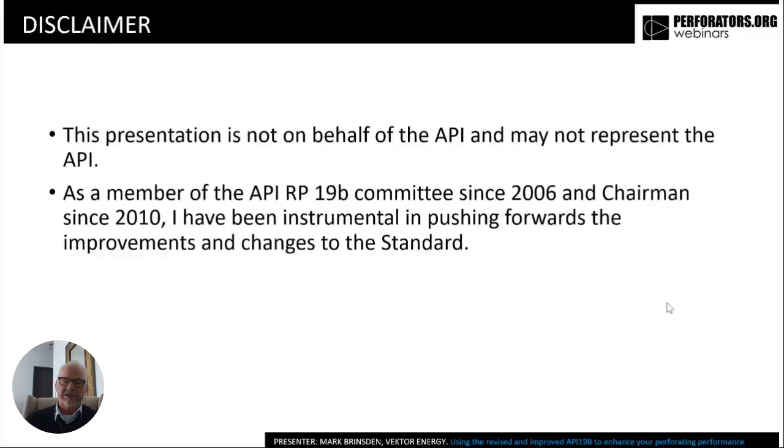What's really important is acknowledging something in this industry, and I want to push this quite hard. It's all about voluntary efforts. There are so many engineers working for operators, service companies, and manufacturers who make it possible for us to have this high quality of API standards. A huge amount of work has gone into this over the last 5, 6, 7 years in making this new standard.

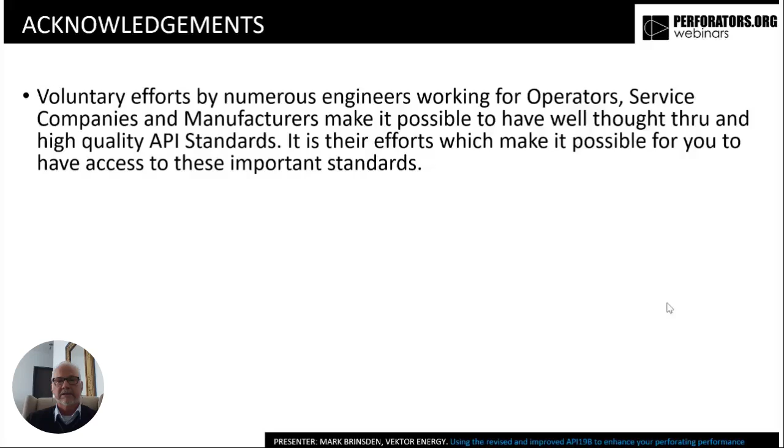Let's be very clear, this is down to individuals who give their own personal time to make things happen. I'd like you all to think about how you can also help deliver standards with the API and other standards organizations, and importantly, volunteer with groups like the IPF and the SPE and those kinds of industry bodies. Volunteer participation is so important.

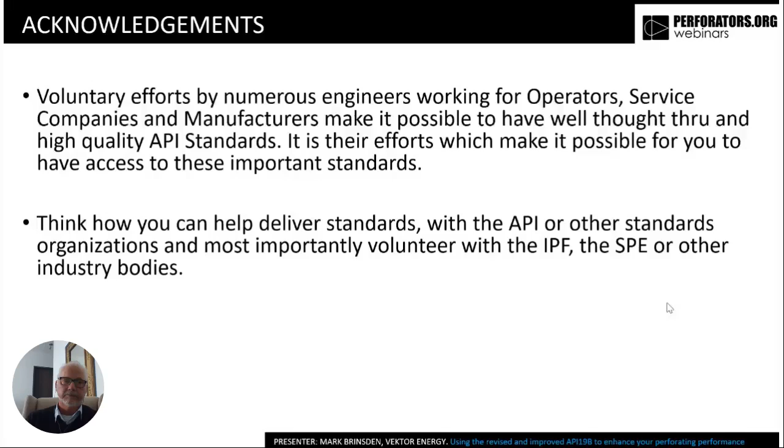There are now 3 API committees involved with perforating. There were 2, but in the last 18 months or so we started another one. The one we're covering in this presentation is the API RP19B. There's also the RP67, the explosive safety recommended practice, which covers all aspects of explosive safety. The new edition comes out with a major increase in scope and is much more comprehensive and detailed.

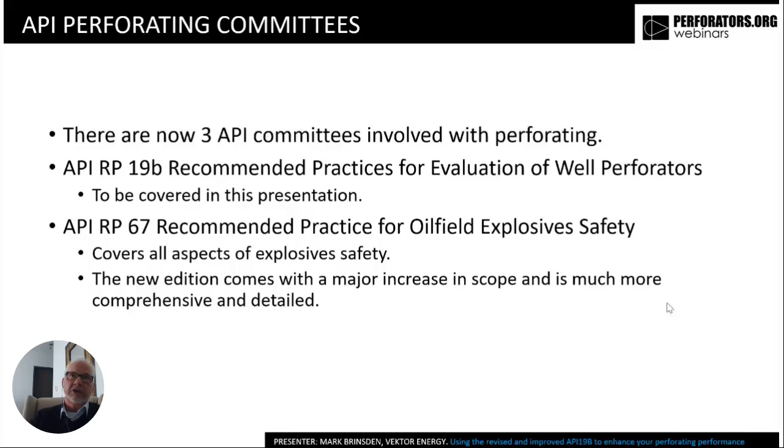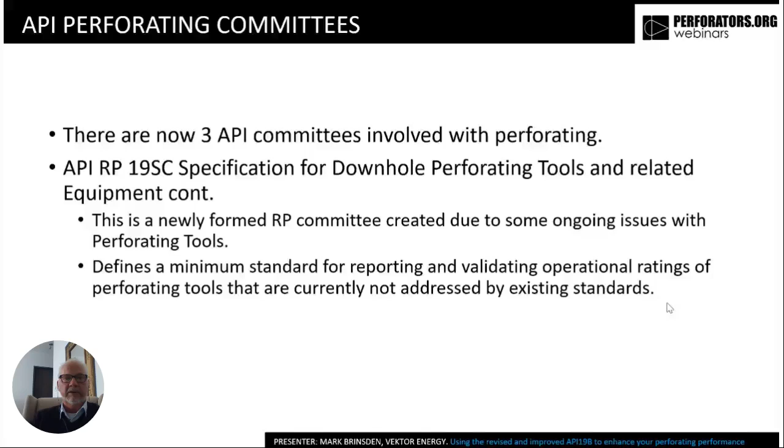I do hope we will get a chance to have a webinar on this topic as well in the next few months, and I'm sure we will. There's also another new one, a specification for downhole perforating tools and related equipment. This came about because people noticed we were going to higher pressures, and they wanted to make sure the tools were performing as required and the standard was being maintained. It defines a minimum standard for reporting and validating operational ratings of perforating tools not covered by any existing standards, covering things like perforating gun materials, connections, seals, cutters, etc.

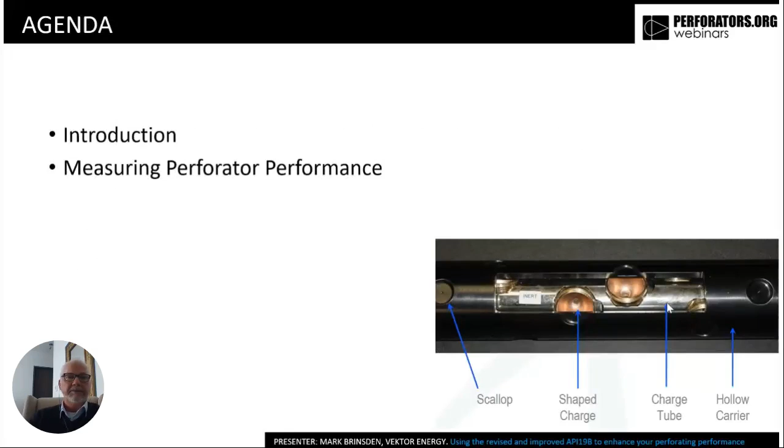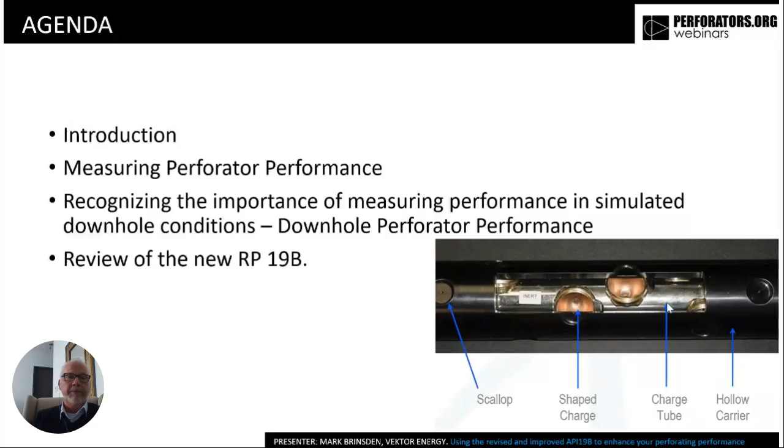So the presentation today is an introduction. We'll talk about measuring perforator performance traditionally, and recognize why it's important to measure perforator performance. Then we'll look at the new API19B and how that's changed from the original one, and look at some conclusions and takeaways.

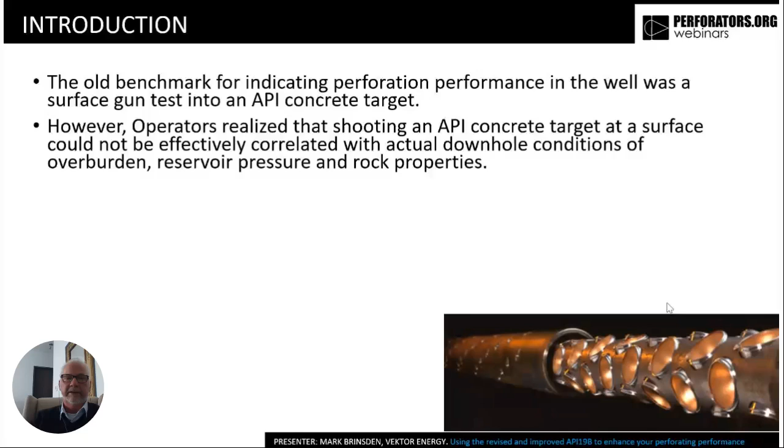For example, the old benchmark for indicating perforator performance in wells was a surface gun test, an API concrete block, and that was great. It created a very consistent result that everybody could compare gun to gun with. However, as operators, we found that the API concrete target was not really representing what was going on downhole, and we couldn't get any real correlation between the concrete target and actual downhole conditions. In downhole conditions, we have overburden, reservoir pressure, and rock properties that all have a big impact on penetration.

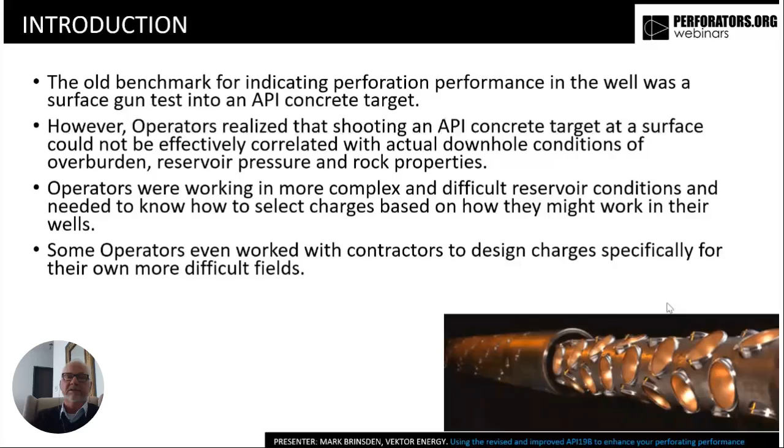As we were starting to work on more difficult reservoirs, we found that we really needed to find a way of selecting charges based on actual performance. Some of the operators, including my previous employer, worked a lot with contractors to design charges specifically for their own more difficult fields, the reservoirs and the rocks, etc., in those fields.

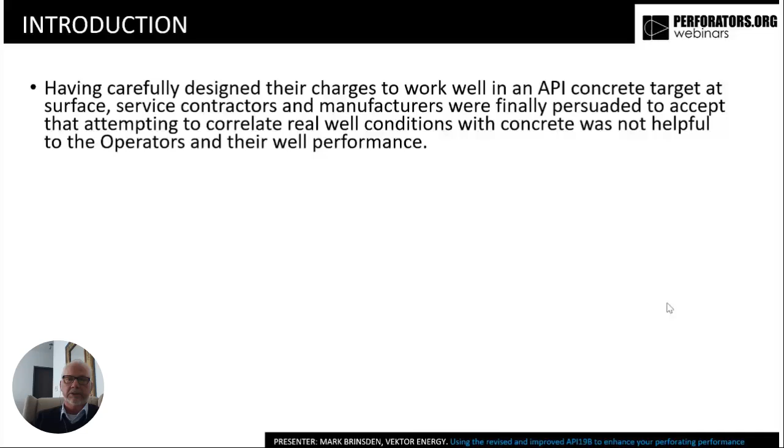From the contractor and manufacturer point of view, having already spent a lot of time designing and manufacturing these new concrete-based charges to perform well in surface concrete, there was a little bit of reticence to move forward with this for a while. But they were very good once they realized this was going to happen, and they all pulled together very well.

With a lot of effort from contractors, manufacturers, and operators, we now have new standards being written to promote shots into stressed rock targets as the main standard for identifying the kind of performance we might expect downhole.

All the major contractors and manufacturers have now dedicated facilities, which is really important.

Okay, I'm still getting issues about not clear enough.

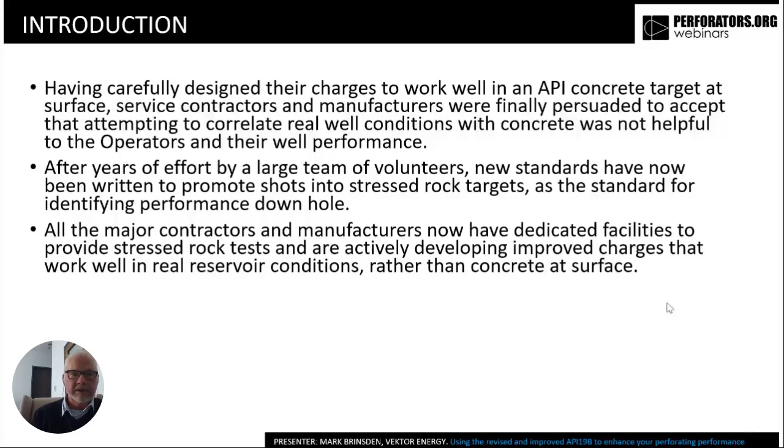All the major contractors have now dedicated facilities to provide stressed rock tests, and that's an amazing accomplishment. A lot of effort, time, and money has been put into this. The last 5 years have seen significant developments in technology with contractors and manufacturers working actively to improve performance and technology.

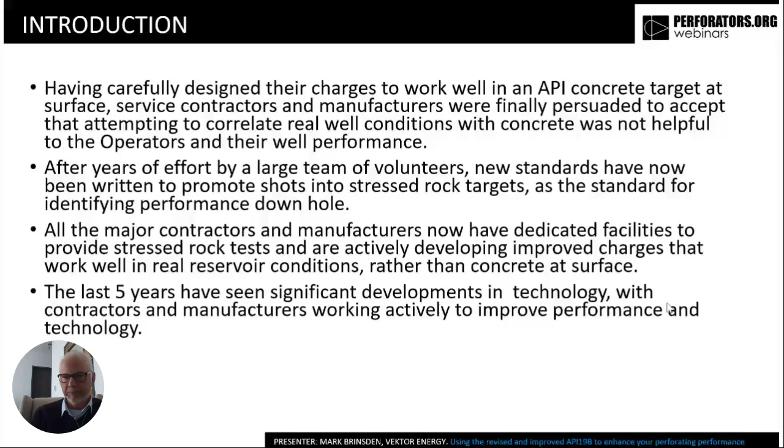and technology. It was very good when they held the mic up. Okay, it's meant to be very good all the time.

Looking back over the last 10 to 15 years, we were told originally that API penetration is measured in concrete, not rock.

Rock is really the best target, but we were told it's very expensive and not repeatable. For example, the Berea sandstone target we were getting at the time was very inconsistent, with different porosities and hardnesses, resulting in very different performance.

Concrete was seen as a very repeatable target, and they even changed the concrete design to a 16/30 frac sand target, which is also relatively reasonable in cost. There's a large database of performance in concrete, so everybody was really pushing towards that.

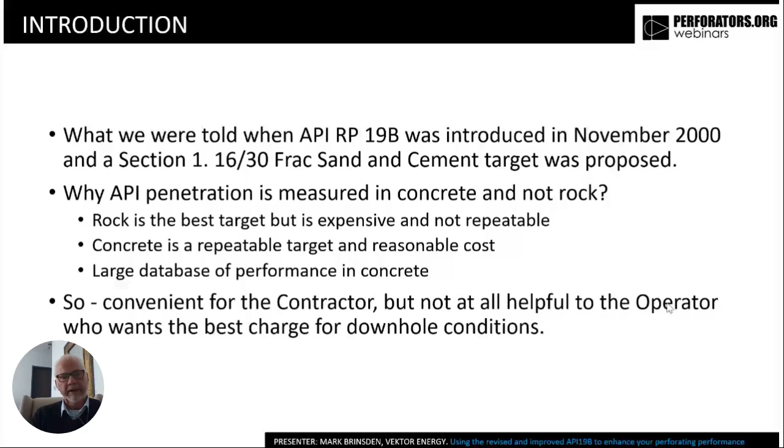It was very convenient for the contractors, but those of us in the operators group wanted something to tell us more about what was going on downhole and how to compare charges from different contractors and manufacturers, rather than just going on concrete performance.

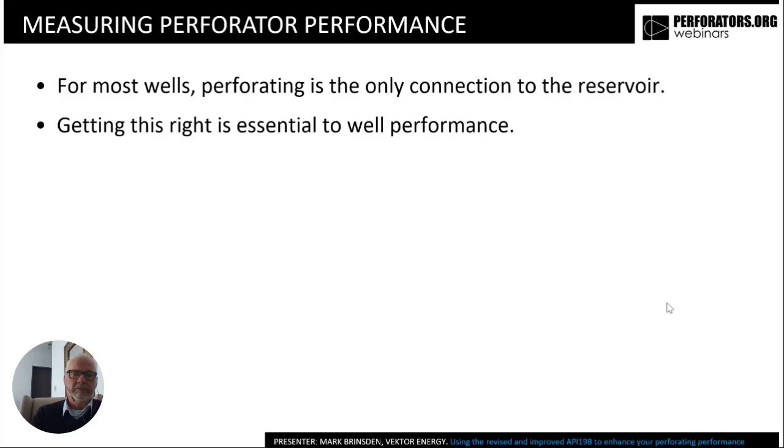For us as operators, it was very important because perforating is the only real connection to the reservoir, and it was really important to get that perforation right so we get good well performance.

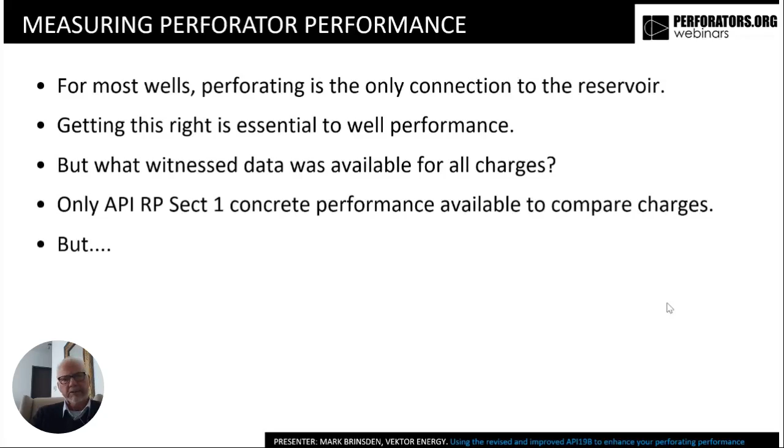But only API section 1 concrete performance was available to compare charges, and it really wasn't good enough. We really needed something better.

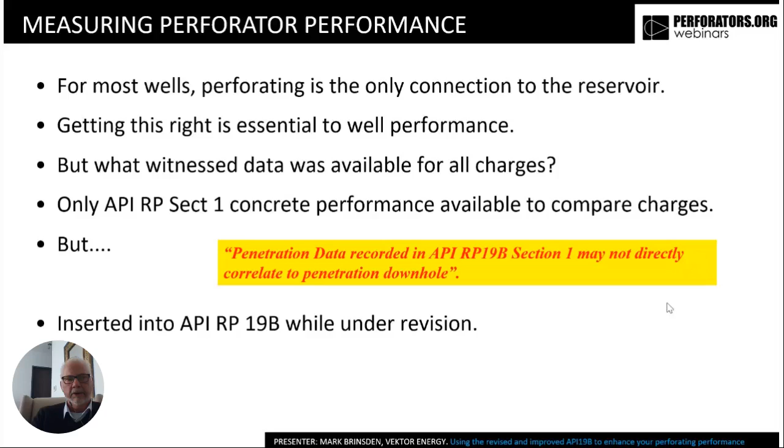About 4 years ago, we inserted this statement: penetration data recorded in API 19B section 1 may not directly correlate to penetration downhole. This was to make sure people were aware that the general consensus in the industry was moving away from a concrete target toward understanding what was really going on downhole.

Now let's look at measuring perforator performance in section 1, as traditionally done. Here's a picture of the target with the casing, and the concrete was set for 28 days to create a consistent strength.

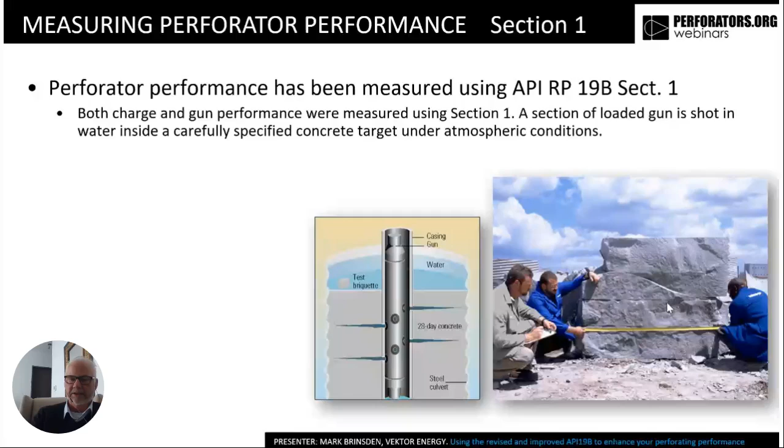It had to be above 5,000 psi compressive strength. You can see on the right a picture of shots going in as the target is split, showing the nice clean lines from the shots entering the target.

While we don't think it's very good from a point of view of penetration in downhole conditions, it does give a fairly good overall indication of charge interference within the gun and an indicative range of perforator performance. Sometimes when you look at charge data sheets, some penetrations might be 50 inches, and others 25 inches. So while the average might be 40 inches, the actual variation is quite considerable, giving an indication of the quality of manufacture of the charge.

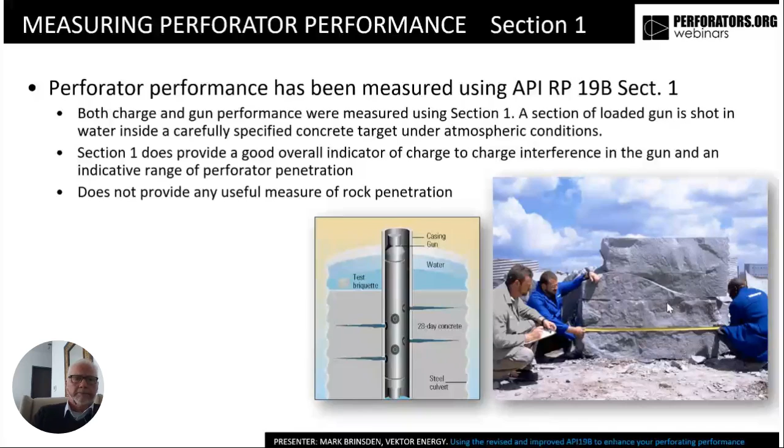Interference is also a big issue, because if the gun is designed incorrectly, charges can interfere with one another and block or disrupt the shot. But as we said, it doesn't produce a significant indication of penetration in downhole conditions.

Interestingly, this is a graph used way back in 2000 to demonstrate why concrete-to-rock correlation was sufficient for use. As you can see, there's a nice straight line through the charted results.

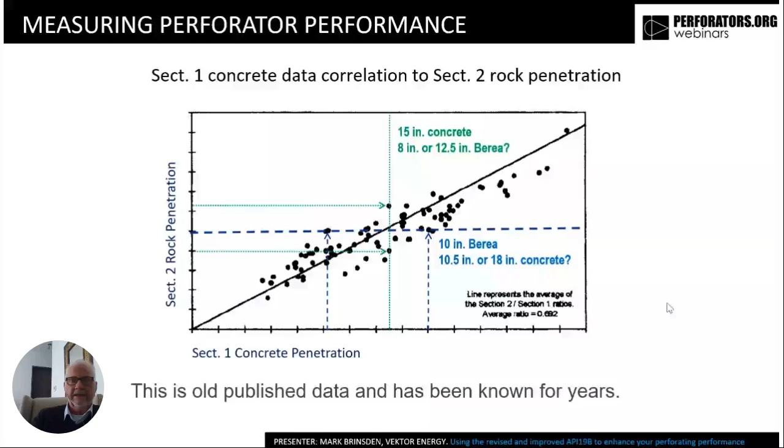However, when you analyze it in more detail, you can see here in the blue lines, for example, that a 10-inch penetration in Berea shows as 18 inches in concrete. That's not looking too great. And for the same charge in concrete it's 15 inches versus 8 inches in Berea. So we were really getting an issue there with relative performance in rock compared to concrete.

The next test, which was very useful for the development of charges for rock, is the stressed Berea sandstone target.

It's very often now used as a charge development tool, as it's relatively quick. It's quite easy to do several tests a day and adjust the charges and look at the performance in relatively good downhole simulated conditions.

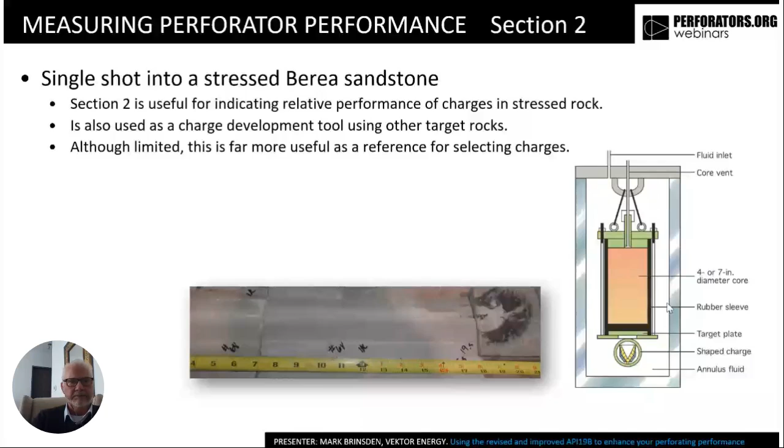Then we have the single shot into a steel target in section 3 under temperature. It's very useful again for looking at performance at temperature.

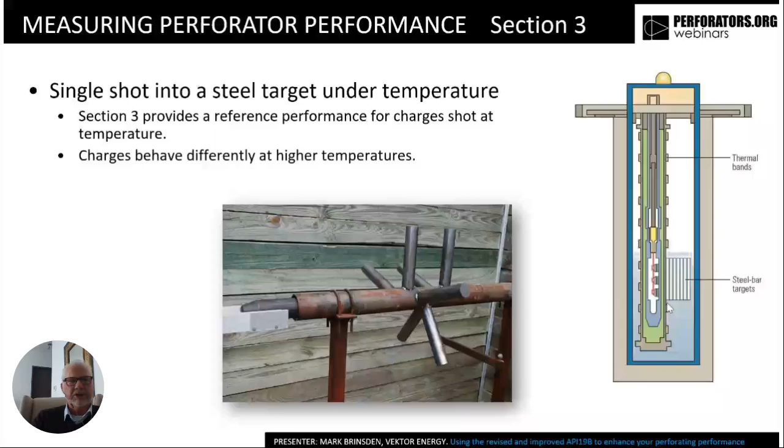And then a very important one, section 4, where we have a single shot into a stressed rock target with fluid pressure and flow. Closest thing really to simulated downhole conditions, and enables us to flow through and backflow, and also look at things like gun volume factors, the way the pressure on the simulated wellbore side and the simulated gun chamber side impact the tunnel and how clean the tunnel is, etc.

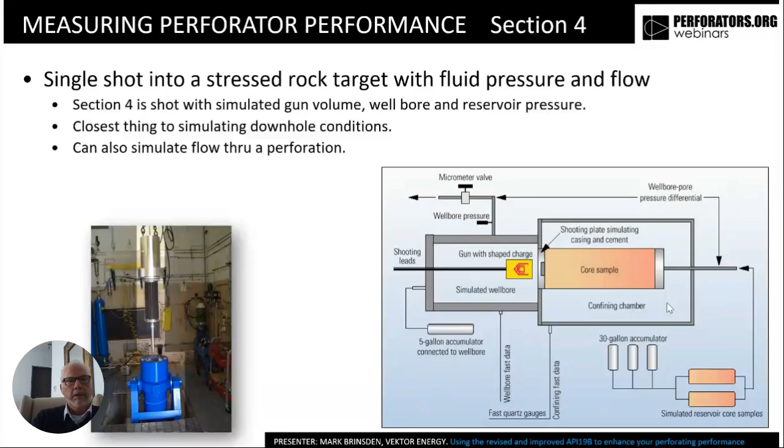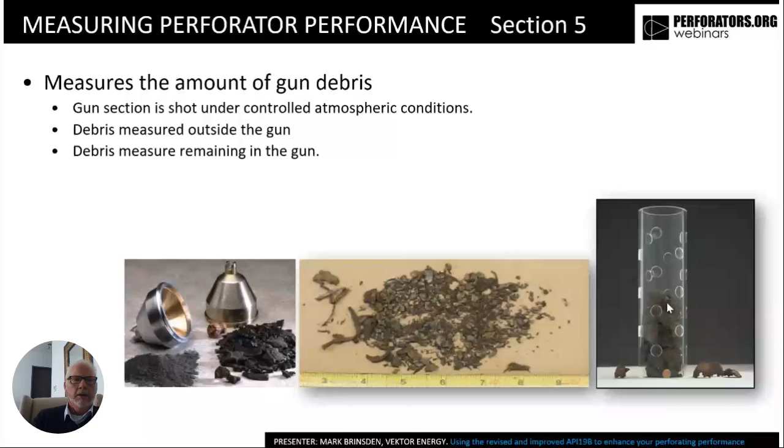Now, let's have a look at measuring perforator performance. So we were looking at how the existing systems were earlier on, and we wanted to find out why that is important now going forward for the difference between concrete and rock penetration.

So it's important for when, for example, you're deciding to use a more expensive charge, that you are aware the charge is actually performing significantly better under the conditions you're talking about.

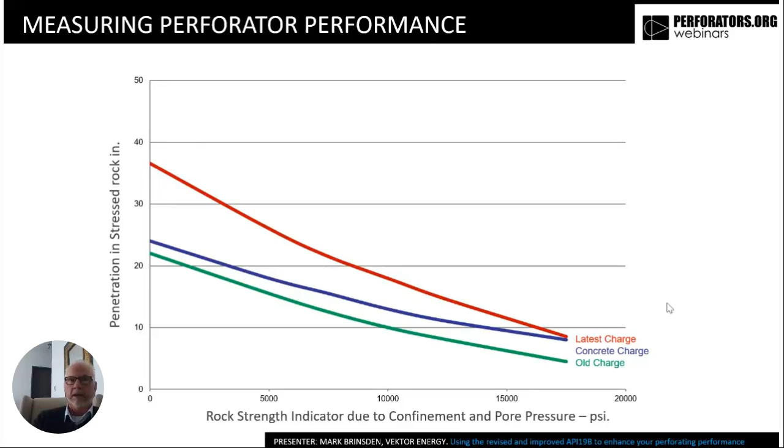Interestingly enough, we actually look at the concrete penetration for these charges. You can see in red at the top, we've got something that's about 48 inches compared to typical downhole conditions of, say, 12 inches. And then if we look at the oldest charge, you can see it's about 35 inches compared to typical downhole conditions of about 8 inches.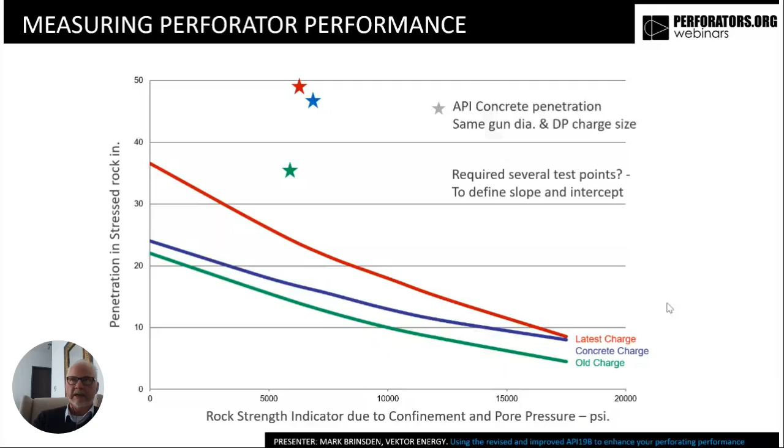So it was really important that we get away from just seeing these wonderful 50-inch penetrations and thinking that's what we're getting downhole, because it's not what we're getting downhole. It's more likely to be somewhere between 10 and 20 inches in reality.

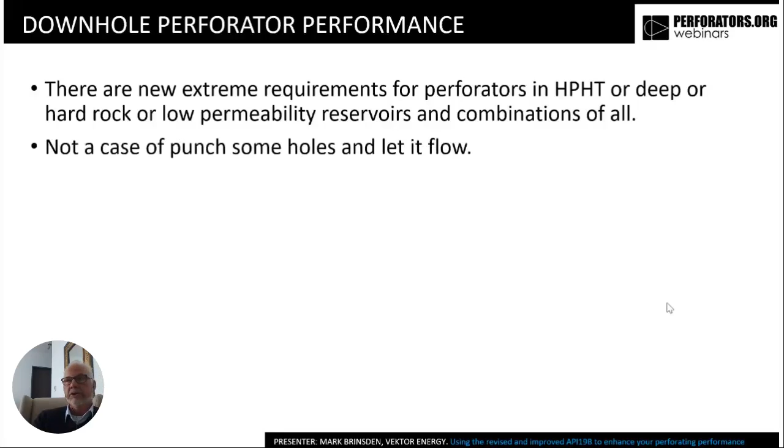There are now new extreme requirements for perforators in HPHT wells and deep hard rocks and very low permeability reservoirs, etc. So there's a lot of new kind of work that we're doing in the last 15, 20 years that wasn't being done when the last standard came out. So it really is time to do this. It's not really a case of just throwing some holes in the ground and hoping for the best.

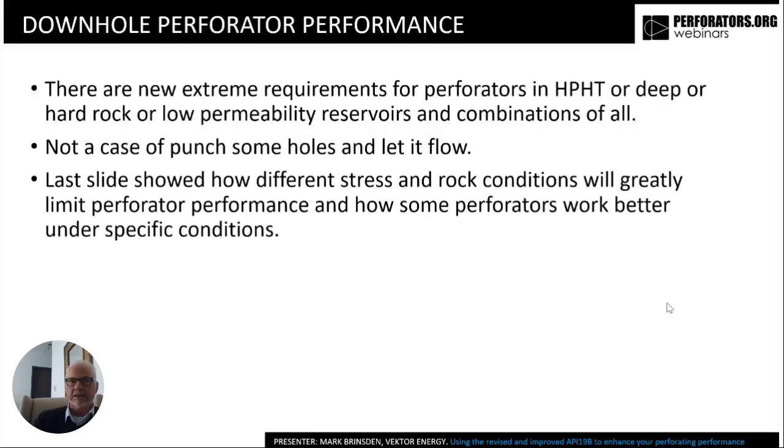Let's have a look at some modeling. So up until a few years ago, everybody was modeling using very little impact of stress and overburden, etc., and pore pressure on penetration.

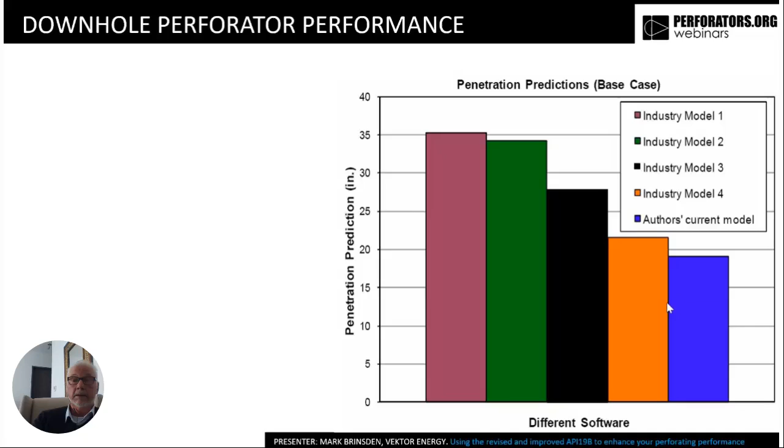Whereas we were getting typically models which were showing that a 4,000 psi UCS rock could have a penetration which is higher than the concrete, which was, say, a UCS of 5,500. Because it appears that 4,000 psi UCS is less than 5,500. So, wow, there must be a better penetration.

But in fact, it didn't take into account that the overburden pressure was 12,000 psi at around 12,000 feet. So that 4,000 psi now suddenly became more like 10,000 psi. So it was really important that we take into account pore pressure and overburden pressure, especially in penetration.

And things like porosity as well. At the time when we were doing our inflow modeling, we were finding that when we get data from contractors about penetration, we plug those into the models, and typically we would take a factor of about 30 to 40% of that penetration to put into the model. So we already knew that the models weren't telling us what we really needed to know, and to fix that, we were making these big correction factors in the models.

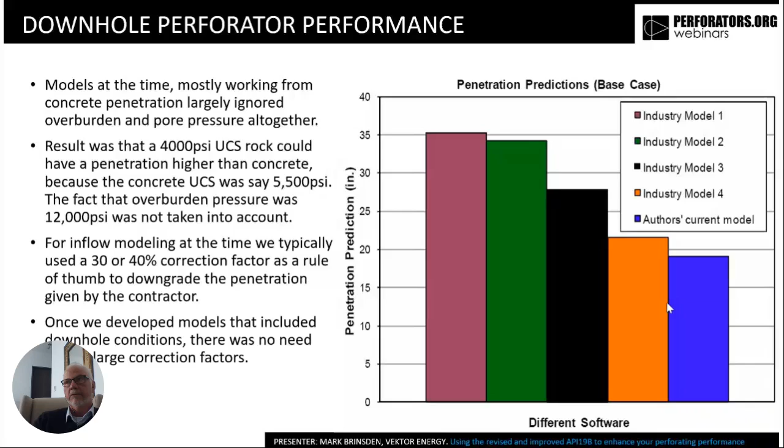However, once we developed some real models which took into account downhole conditions, then we found that we didn't need to make these correction factors anymore. So let's have a look at this, and you can see here we've got 2 guns operating in stressed rock.

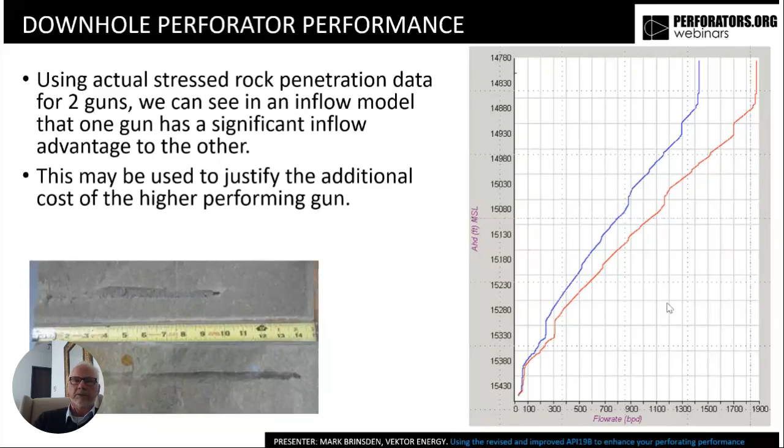We can see that in the inflow model on the right, one gun has a significantly better advantage over the other. And you can see that it's generally smart to actually do your inflow performance work based on either a very, very good model or some penetration data that you've taken from real rock data.

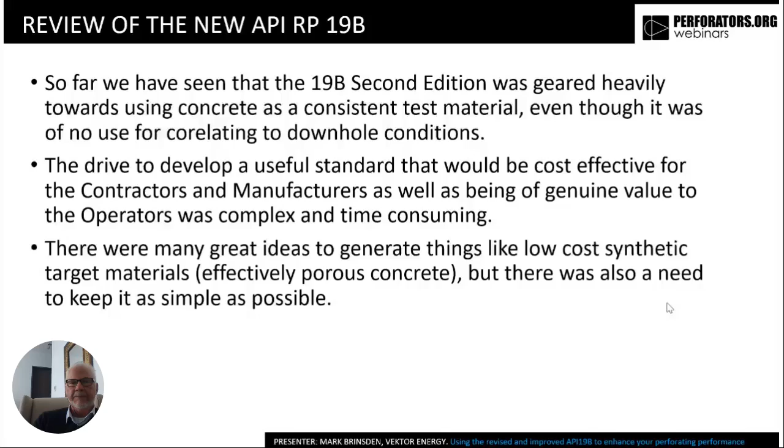So far, we can see that the old system was geared heavily towards using concrete as a consistent test material, even though it was not really any use for correlating downhole conditions. And there were great ideas to generate things like low-cost synthetic target materials as well. But we decided to keep it as simple as possible going forward.

Now, looking at the new API 19B, new section numbering has been introduced, but we managed to put it in the same order, but in this case with a 4 before it. So 4.1 is now surface conditions, concrete targets, and is basically the same as before. However, it's now allowing for mixed charge systems. So typically now we're seeing companies putting more than one type of charge into a single carrier.

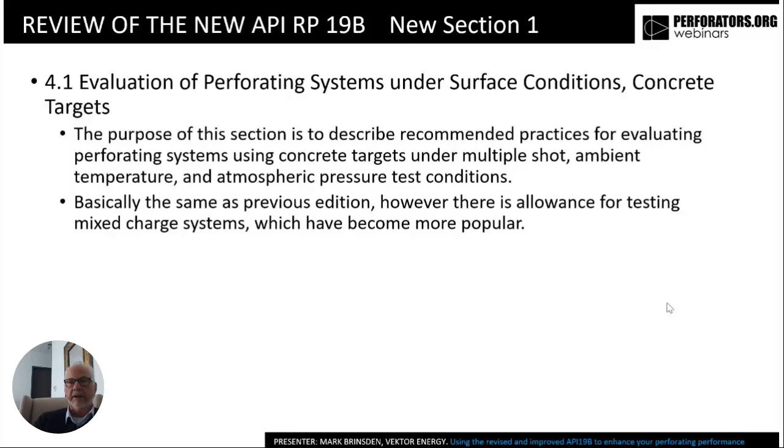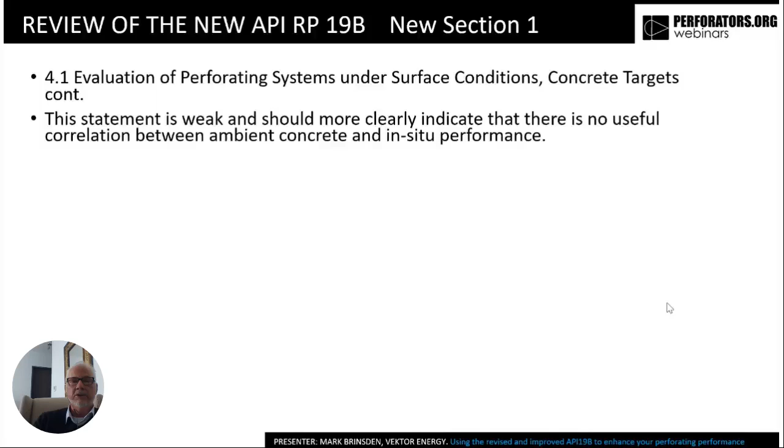And it also clearly states that penetration data recorded in API 19B section 1 may not be directly correlated to downhole conditions. I felt the statement was weak and should really clearly indicate that there is no useful correlation between ambient concrete and in situ performance. So in May 2019, I challenged the use of this weak statement, and we had a unanimous vote, and it was decided to change the statement to something like: penetration data recorded in 19B does not correlate to penetration downhole. So please take that into account when either you're buying or selling gun systems.

But it really is going back to the importance of this section 1. It's charge interference and relative performance in the target system, and it's very, very important. We cannot do away with this at all.

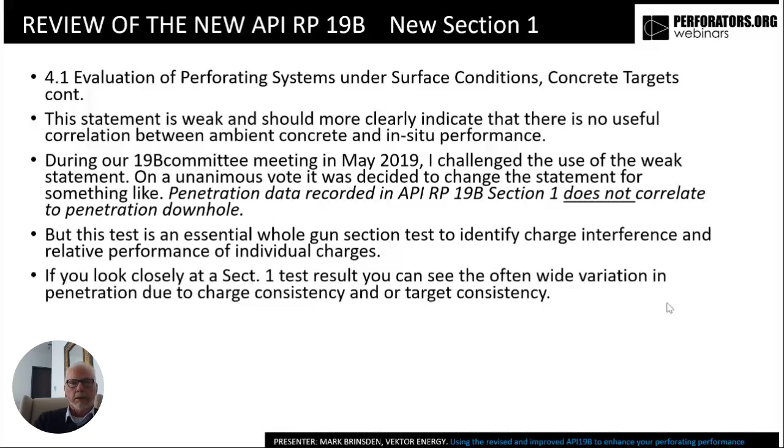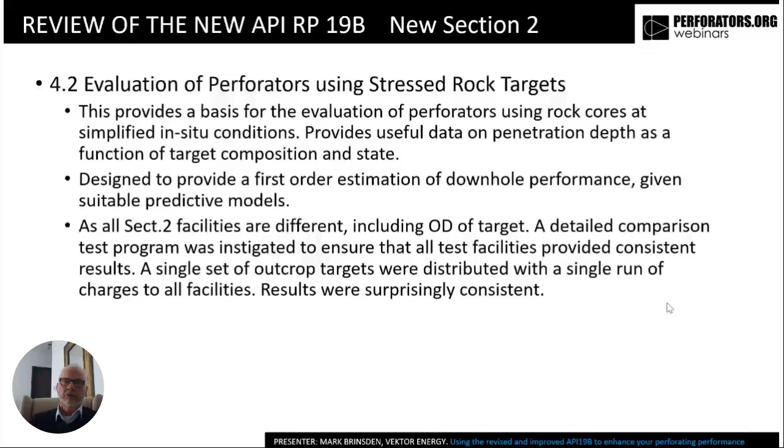However, a detailed comparison test program was carried out 2 years ago and only finalized last year, which was instigated to ensure that all test facilities were able to provide consistent results. So a single set of rock targets were distributed from a single quarry run, and also a single run of charges was distributed from one manufacturer to all the facilities. I'm very, very pleased to see that the results were very, very consistent.

And we decided there will be 3 tests under confinement pressures of 1500, 5500, and 9500 to give us a kind of curve to show the performance in downhole conditions of a given charge in a given target. And to make sure of consistency, there'll be 4 shots in each target. And we will record casing hole dimensions, total core penetration, and total target penetration.

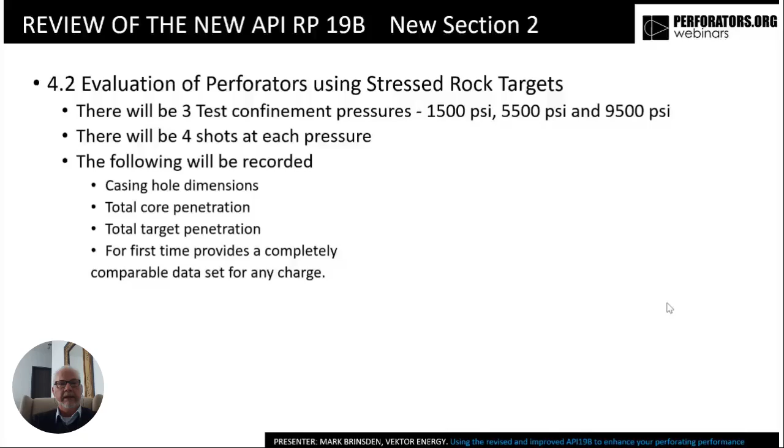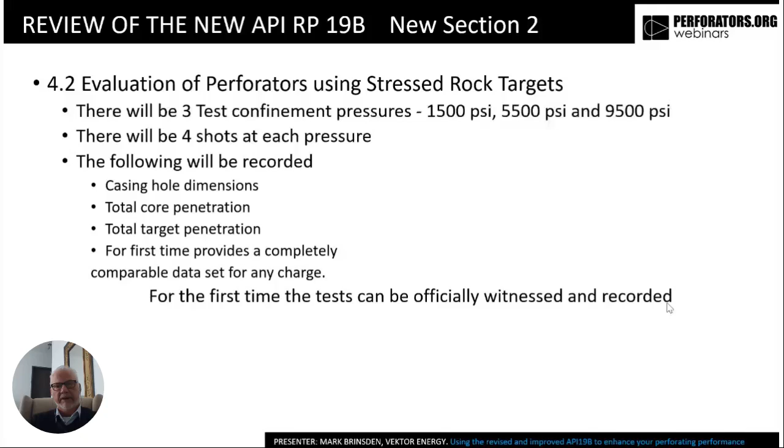And this, for the first time, really provides a completely comparable data set for any charge. It's not perfect, but it's a lot better. And we can certainly improve, I'm sure, over time. But for the next few years, this will be the way we do things. What's important as well, for the first time, these tests will be officially witnessed and recorded just like they are in the Section 1 tests.

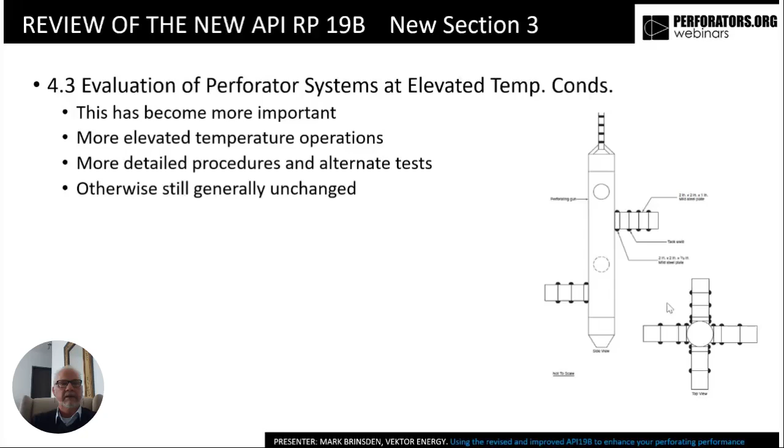Section 3 is the evaluation of elevated temperature conditions test. And basically, it's unchanged. It's a little bit more detailed. It was written more clearly, I think, than last time. And we can now operate in slightly more elevated conditions.

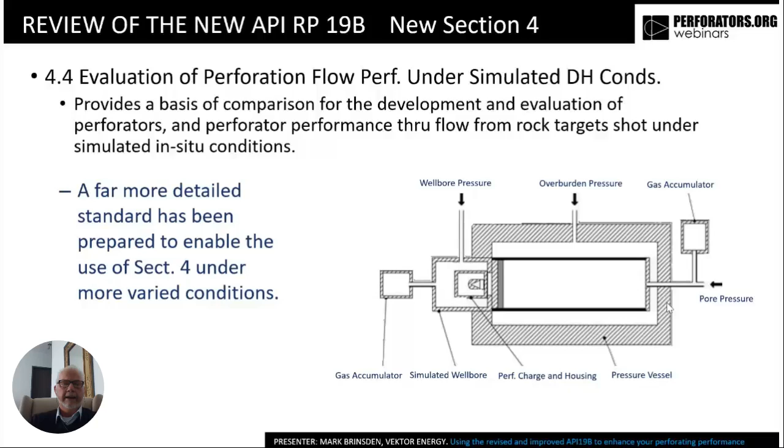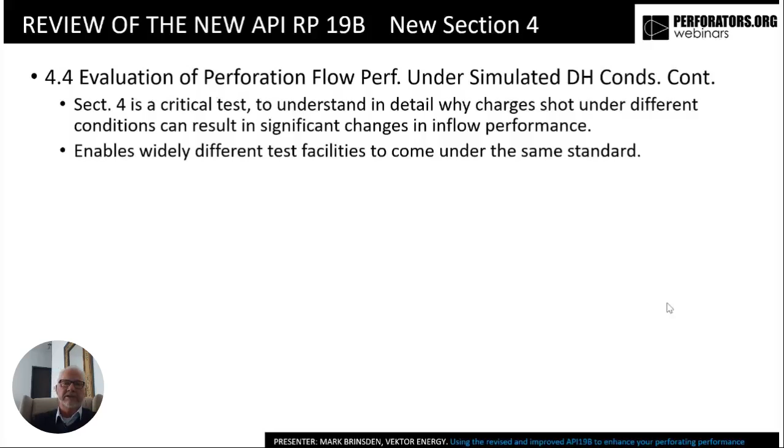Section 4 is good because we've written up the standard in a far more detailed way, and it allows us to use it under more varied conditions. It's a really critical test, and it gives us a really clear indication of inflow performance in wells. And using this new standard, we are able to make sure that the different test facilities come under the same conditions.

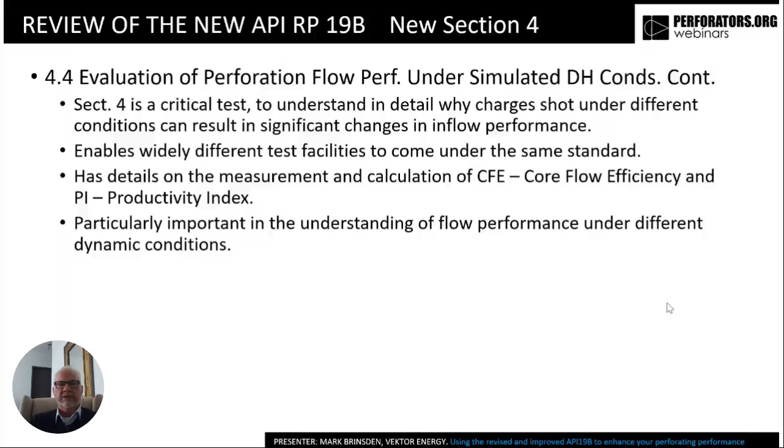So core flow efficiency and productivity index are the key things that we're now able to get out of this. And there's a consistent way we are measuring these. How to do the calculation, how to do the measurement is clearly stated in the new section 4. So we have a consistent result coming out from all manufacturers and contractors.

And as I said earlier, this is a test that's very important for showing how flow performance is affected by different dynamic conditions in terms of wellbore to reservoir and gun carrier volume.

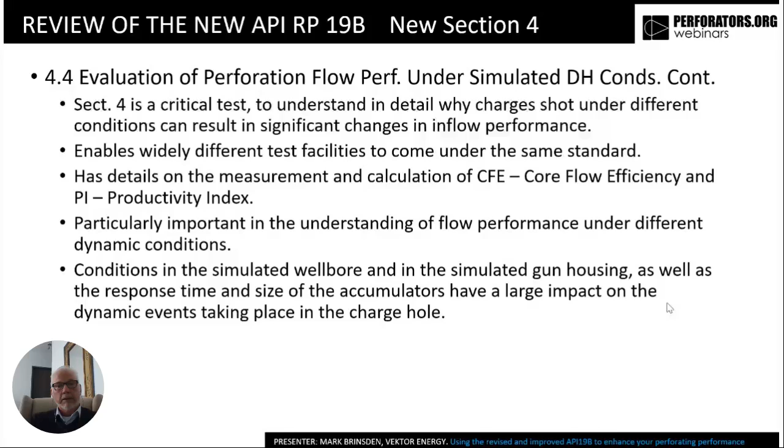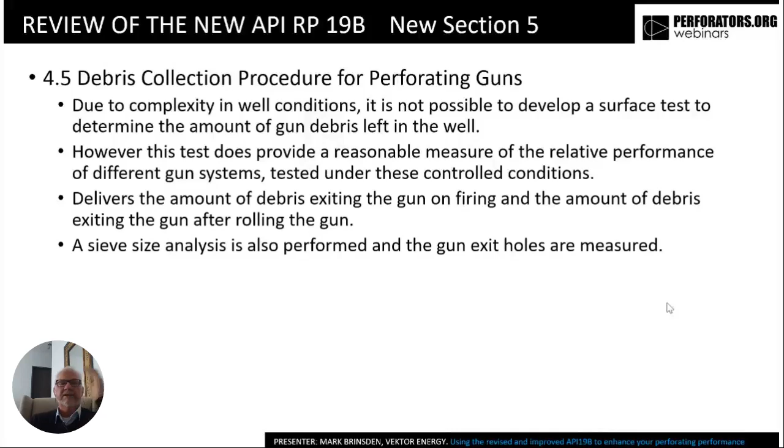Okay, so finally, section 5 has been rewritten a little as well. It does provide a reasonable measure of relative performance of different gun systems, and it's tested under controlled conditions. And sieve size analysis and things are in there as well. I'm rushing a little bit here.

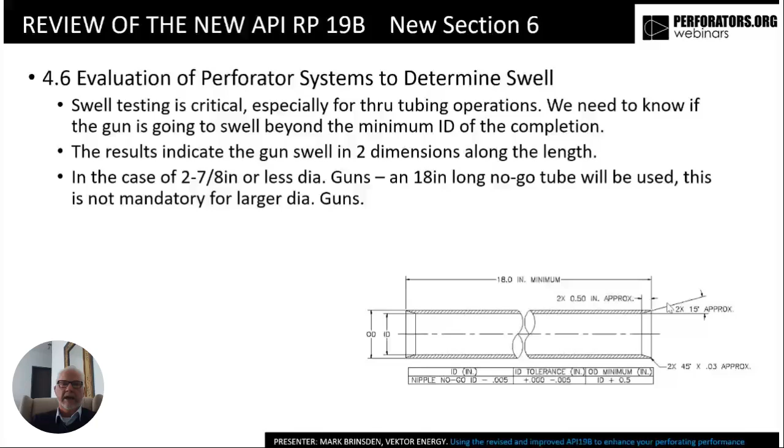There's a new system that's coming out now, swell determination. We've had something like this before, but now we've got it down to a much clearer design recommendation. The results indicate the gun swell along 2 dimensions along the length of the gun. In this case, for example, a 2 7/8 inch gun or less diameter, we have this 18-inch no-go tube. And this is because we have a tendency in smaller guns not only to swell, but to bend as well.

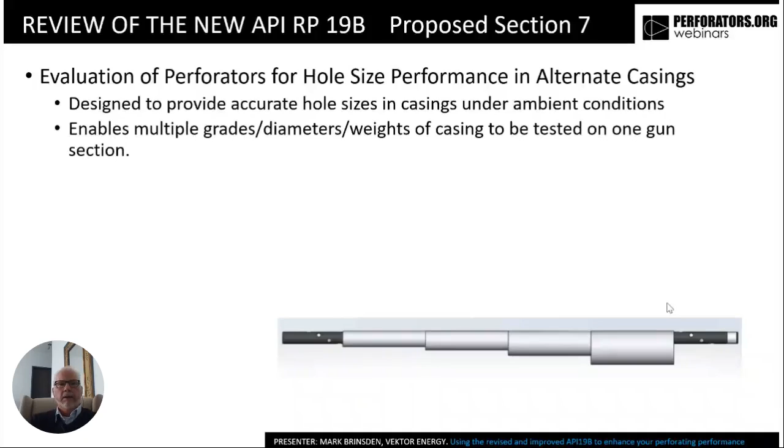Now we've got a proposed section 7 coming along. We were thinking of trying to get it in this time, but there's still a lot of discussion going on about how to get this consistent and right and how everybody can agree on it. It enables us with one shot to take different grades and diameters and weights, etc., of casing to be tested on one gun section.

And that's a very useful thing because that's going to give us some very important information on relative hole sizes, burr heights, and the effect of gun clearance on shot penetration, and could also be shot in either fluid or in air.

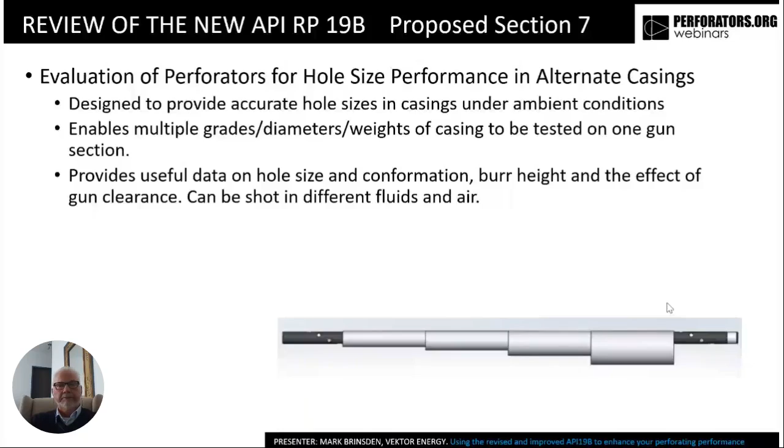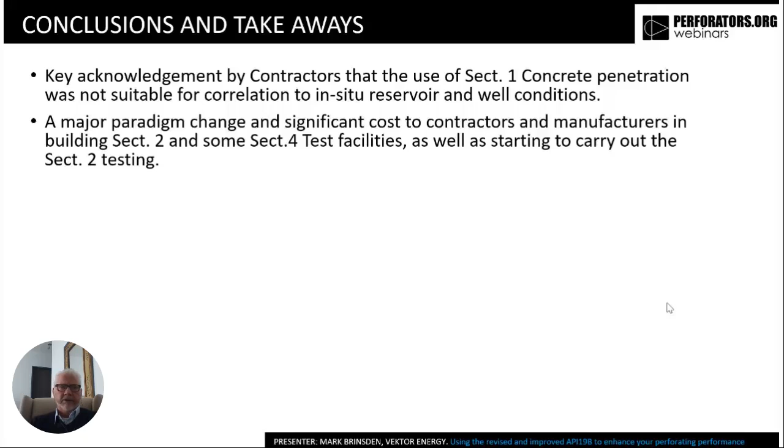So as we said, for a section 2 test, we're going to have 4 shots each in 3 different pressure conditions. And 12 shots is quite a lot of cost and time involved in doing this. And then you've got the cost of the target material as well. And so, congratulations to all the contractors and operators for making a huge effort to get their systems up and running and to agree to this new standard.

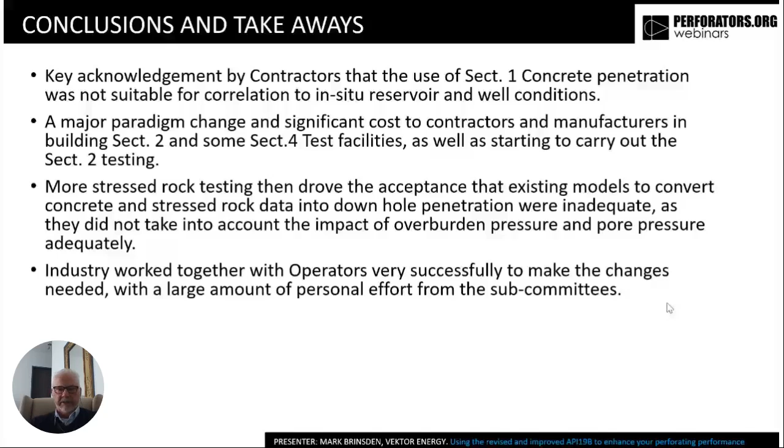One other thing that's going on right now, API is now sponsoring some work we're doing on time, temperature, thermal decomposition, and stability of HMX. This is what we're doing with Lawrence Livermore National Laboratory using ODTX, which is one-dimensional time to explosion, in those ODTX test cells.

Complex offshore floater jobs are really where we're going with this. Sometimes it takes an awful long time to run guns on completions, for example. And if we have to pull them, it can take us a lot of time. And then we could have weather conditions as well. And it can result in weeks, potentially, of guns being in hole. So rather than just being concerned about what happens over 100 hours, we're now concerned what happens over weeks of guns being in hole at extended temperatures, borderline temperatures like 160 degrees centigrade, where HMX is kind of borderline.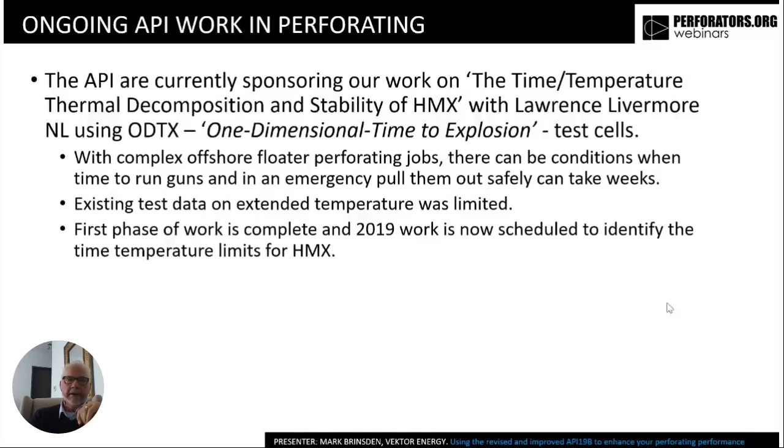We then extended that to 165, and we're now doing more tests on a different type of HMX, just to make sure that different formulations with different binders, etc., performed similarly. So we're repeating some of the tests in this particular area of 170, 160, where we're pushing out the envelope of HMX.

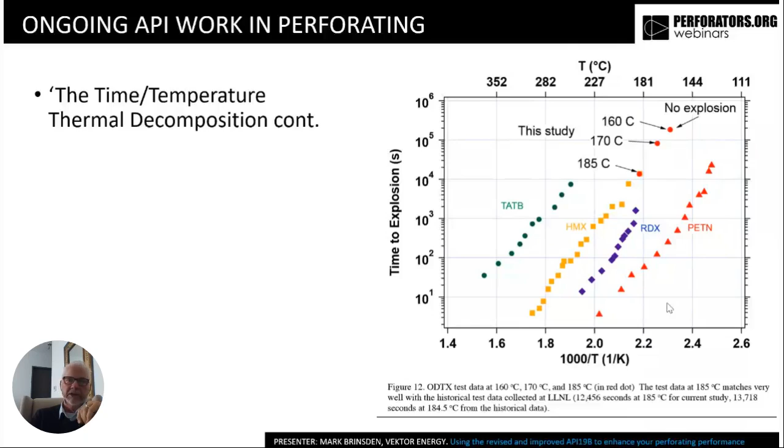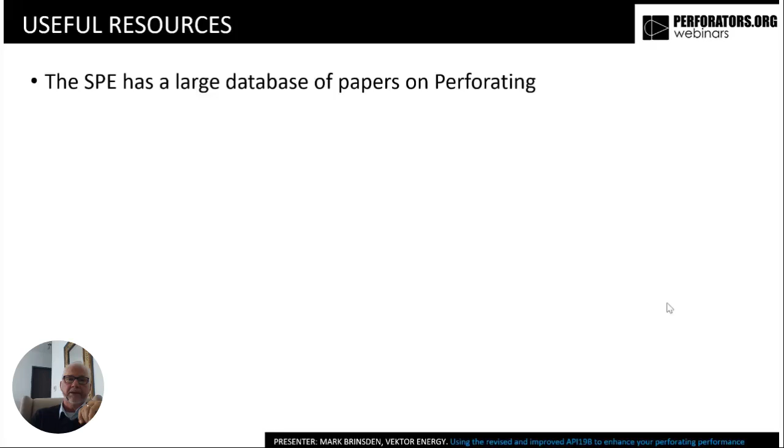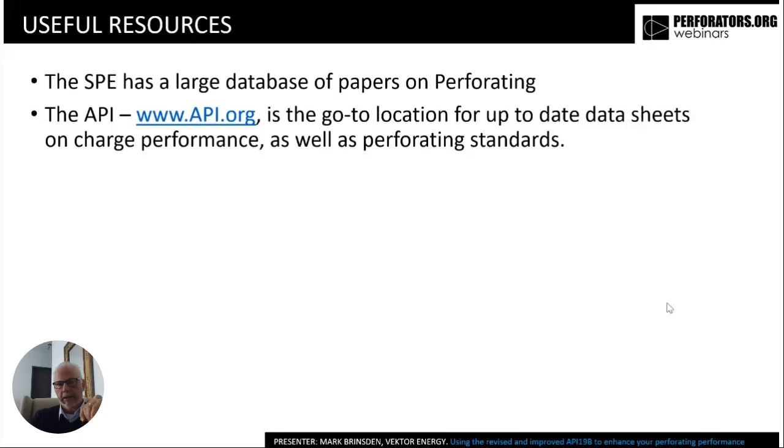Okay, finally, looking at useful resources going forward for viewers here. The SPE has a great database of papers on perforating, so I certainly recommend you go there for a lot of up-to-date papers. API is the go-to place for your data sheets on charge performance, and that has all been revised and updated, and I certainly recommend you keeping in touch with that.

The IPF has a great perforating website called perforators.org, and that's going to show you a lot of perforating presentations. Every year we tend to have a couple of conferences around the world, and you'll see all those conference papers put up on the web. So that's very, very useful. And then we have a perforating safety database.

I do recommend that if you are aware of incidents in the perforating industry, you can put that information up on the safety database. It can be put up in a way that doesn't show the originator, doesn't show the operator, but gives us the basic data, what happened, and what should we be watching out for ourselves in the future. So that database is very useful, and I certainly recommend it. It's the only one in the industry, and we need to keep that up to date.

And then a couple of years ago, we started the Journal of the International Perforating Forum, and that focuses a little bit more on the deep technical side of perforating, the kind of stuff that probably isn't that suitable for the SPE, as it's very, very specific, hard technical stuff on perforating. And then now we have this new webinar series, and all of these things are free. So I would recommend you go ahead and get involved with the IPF and these other organizations, and enjoy learning about perforating and taking part.